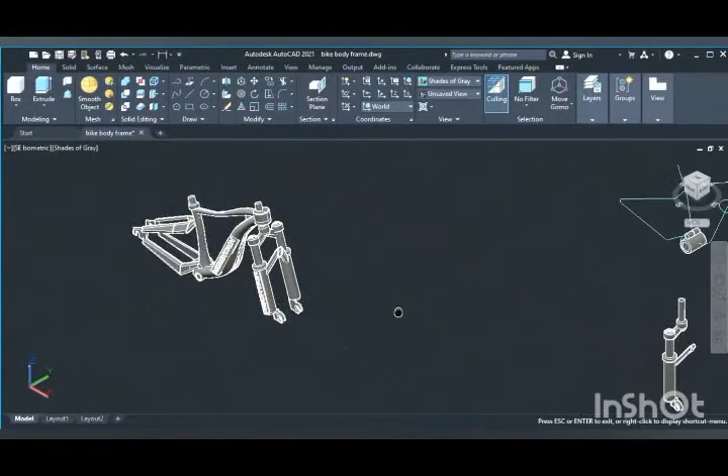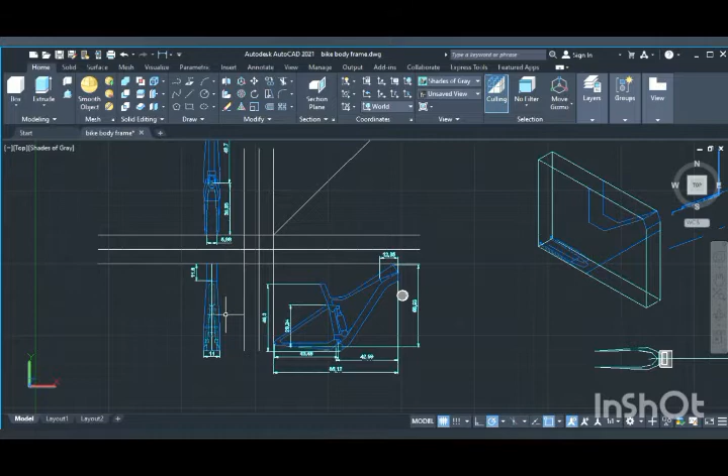Basically what I'm drawing for my part is the body frame of the bike and fork of the bike. First of all, I'm drawing the orthographic picture first because I don't have an actual bicycle that can give me a real measurement. So the measurement that I have is from the internet.

I'm drawing the fork first like this, then I'm drawing the frame. Then I'm drawing the circle in the middle of the path of the frame because I will be using the loft. I will copy it into 3 or 4 parts.

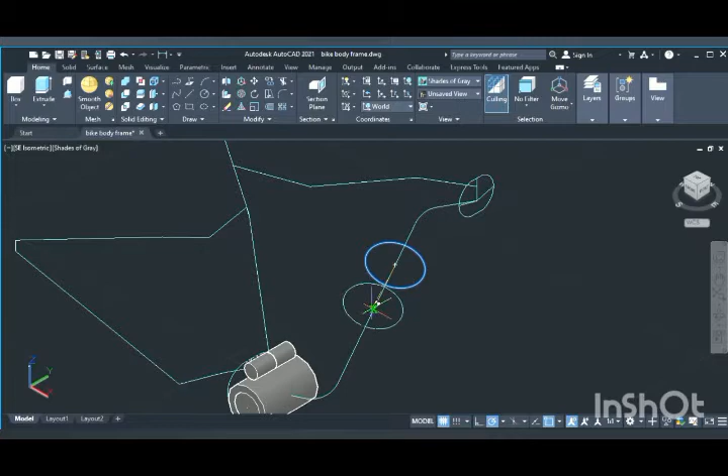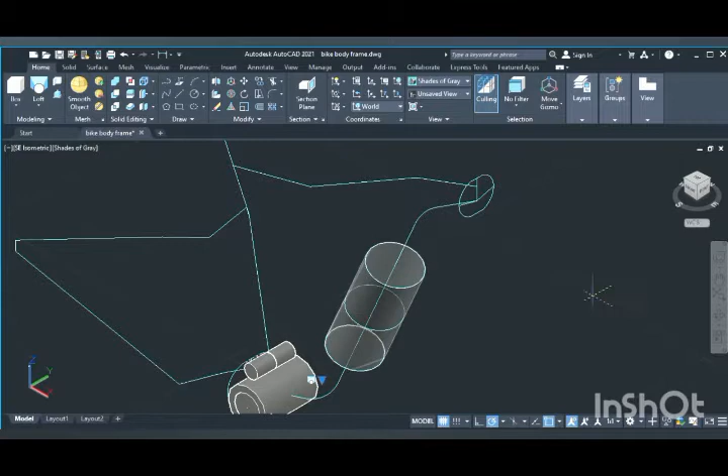I will copy the selection, take the middle and then transfer it to another path, like this. Then I will select loft to make a selection that will transfer into a 3D shape like this.

So I will get the perfect cylinder part. I don't want this size actually, so I will make a different size so it looks like this. I will start with smaller, then bigger, then at the end it will be the biggest.

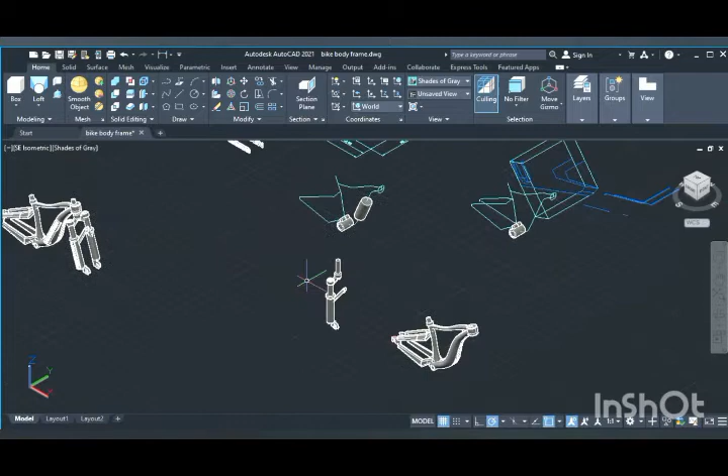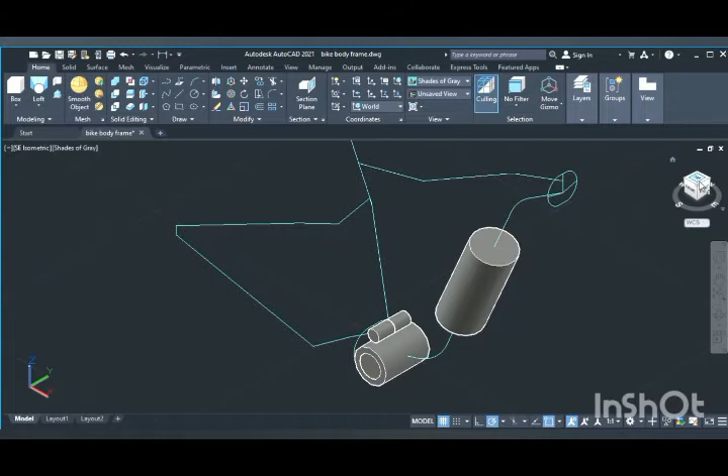Then for the back fork, I'm using the same concept, then I will copy it and transfer it using a mirror. First I will select it like this, then enter. It asks for the mirror 3D 3 points, so I will select the front, middle and end for the path, then enter.

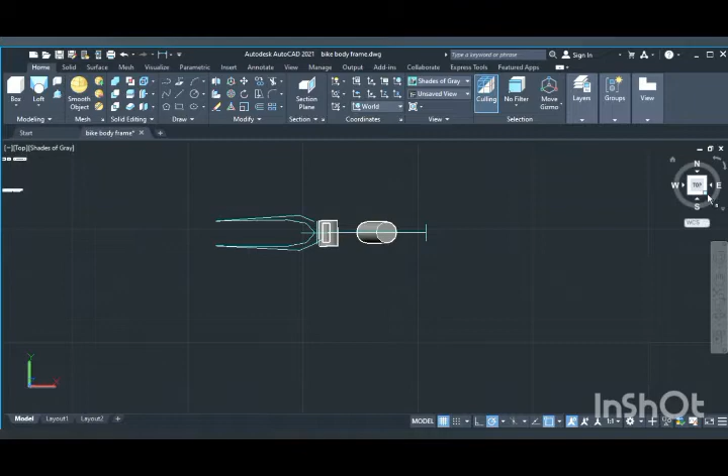Basically for the first time I will draw it, finish it for the side, then I will make a mirror. For the fork, it's still the same, because basically I'm just using a cylinder for the side, then I will transfer it to the other side. So I will have it like this.

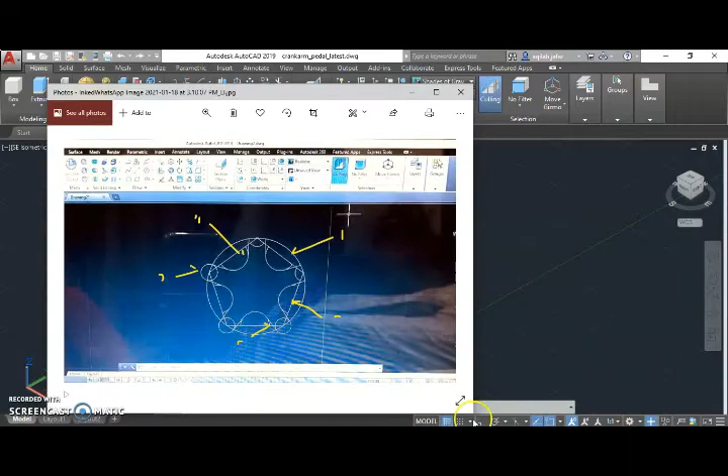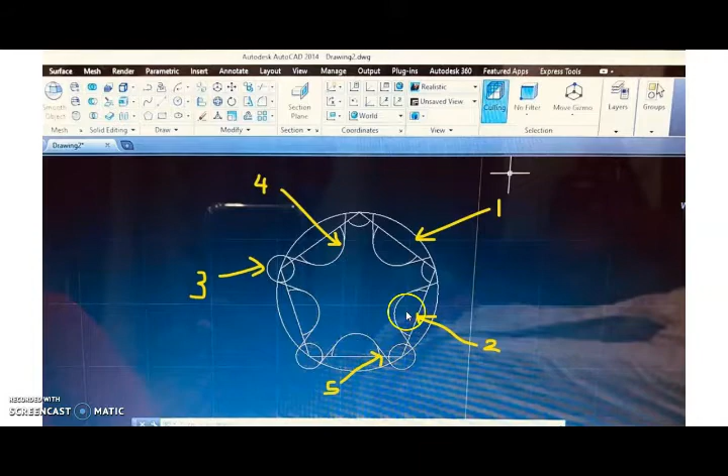Let me show you. First of all, I drew a big circle. Secondly, I drew a polygon. Thirdly, I draw a small circle according to the center of the polygon. Then I drew a circle again, taking the midpoint between the corner of the polygon as the center of the circle. Then I draw a line so that the small circle and the large circle will connect.

Finally, I trim the unnecessary line. Second step, I extrude it. For this hole, I made a circle first, then I press pull it. Lastly, I use fillet edge to make it look more attractive. Besides this part, I draw the cone first, then I subtract the part I want to remove, so it becomes a half cone.

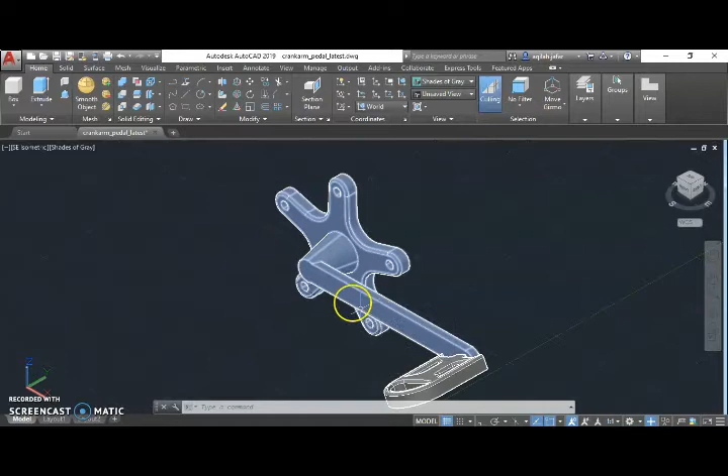For this part, I made a line first, then I join it and select extrude, half circle on each side. I made a circle first, then I subtract. This part also I subtract and put it together and select union. Last but not least, this pedal part, I drew the

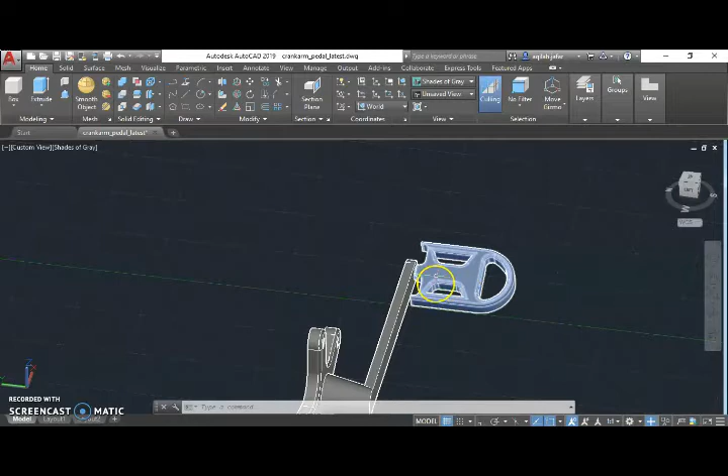rectangle first. For this part I use fillet. And then I drew a rectangle again and used fillet to make it curved. Then I used mirror to create the same thing for the other side. This side I use the same technique. After I join it all together, I extrude it, and for this part I use press pull to make the holes.

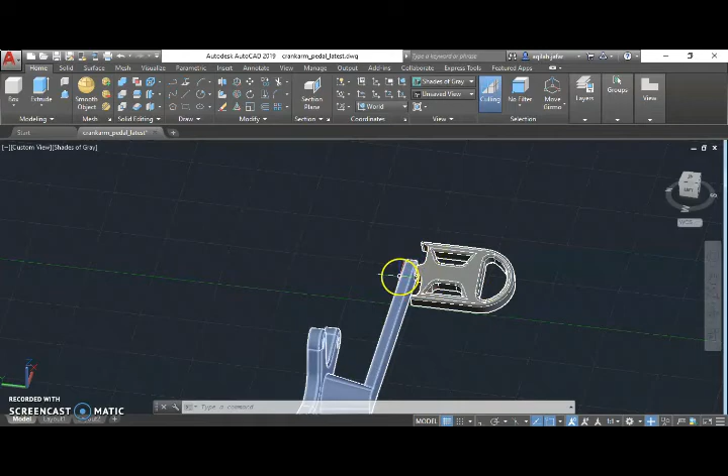This side I use subtract, and each side I use a fillet edge. Okay, like this. Lastly, let me move this pedal away.

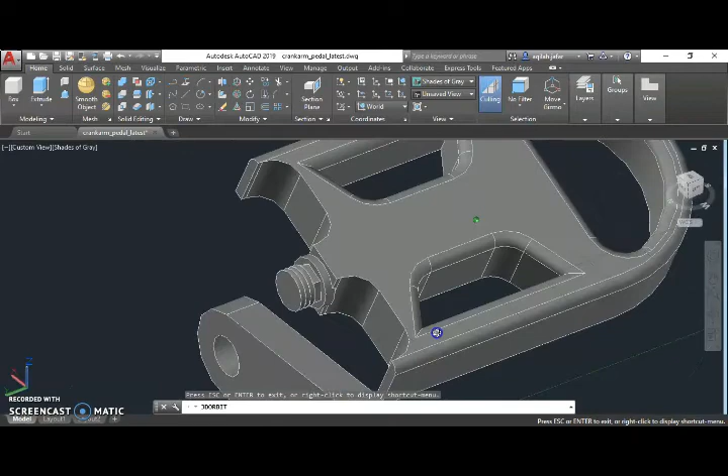For this side, the screw part, I draw a circle and polygon first. Then I extrude both of that. Then for this part, I use loft. Lastly, I select union.

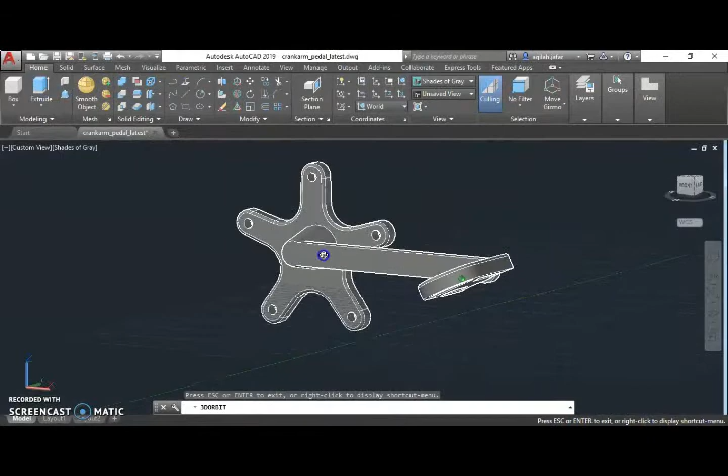That's all for my part. Thank you.

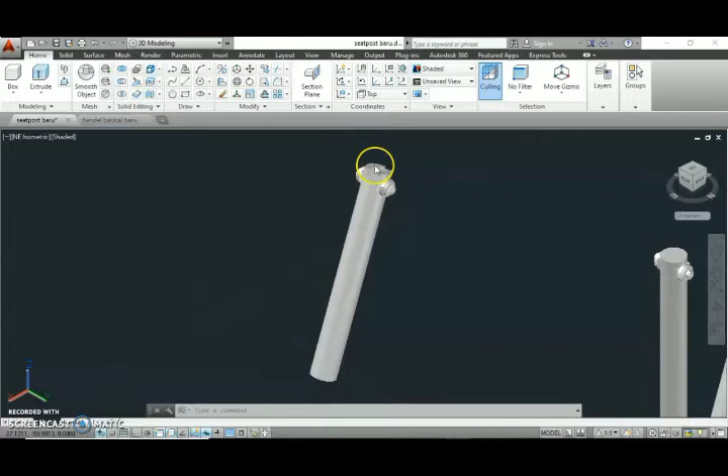So for this part, the way for the seat rod to be locked, first I use a double circle, and I use press pull. And then for this part, I use a cylinder and subtract it.

So this screw and nut, I'm using a polygon. I make it six sides, and I put a circle in the middle of the polygon. So I press pull it to a certain height.

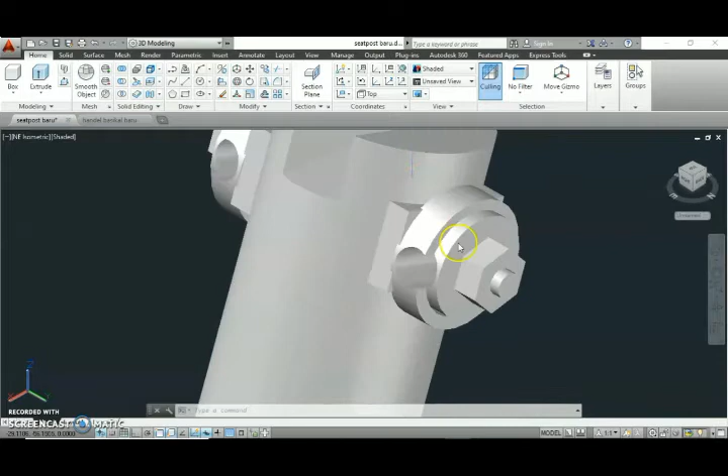Finally, all this part here I use copy from this side, and I put it here. So after doing all this part, I combine all the parts here to make it as one.

So next, my part is the bicycle handle. For the grip handle, I use a loft. I made two circles here and here, and used a single line between them, so finally it becomes like this.

For the middle rod, I use a cylinder. I put in a diameter and combine it with the handle. For here and this, I just use a simple circle and use press pull to make it high.

My first step will be drawing the holder for the spike, or in Malay we call it jari. First, I use 2D drawing where I sketch it first, then I use extrude and choose revolve. When I choose revolve, it makes this 3D shape. As you can see, this is the 3D holder for the spike.

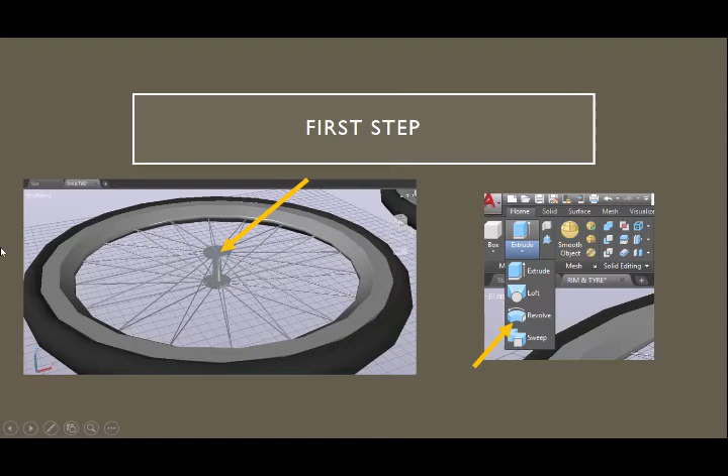For the second step, I make the rim and the tire. First I take a circle which will be the diameter, which will be 660.4 millimeters, and the width of the tire and rim will be 1.95 inches. If we convert it, it will be 49.5 something, like that.

So to make a big difference between rims and tire, I choose to make a different color. I went to visualize and material browser, where I pick the color rubber, which is black. When I drag it down, it makes the whole tire black, and inside it is the rim.

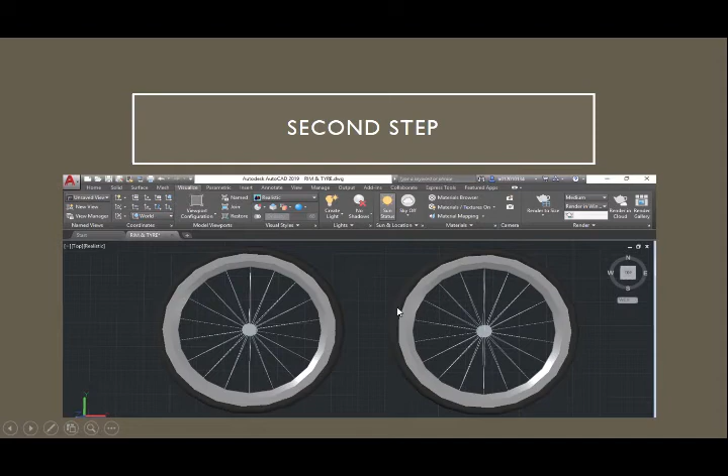For the third step, after making the tires and rim, I make the spike. First, to make the spike, I choose to make a triangle. Then I choose circle and put it at the end of the triangle, and I choose sweep at extrude and make it turn into a diameter of 2 millimeters, to make it beautiful like the real spike.

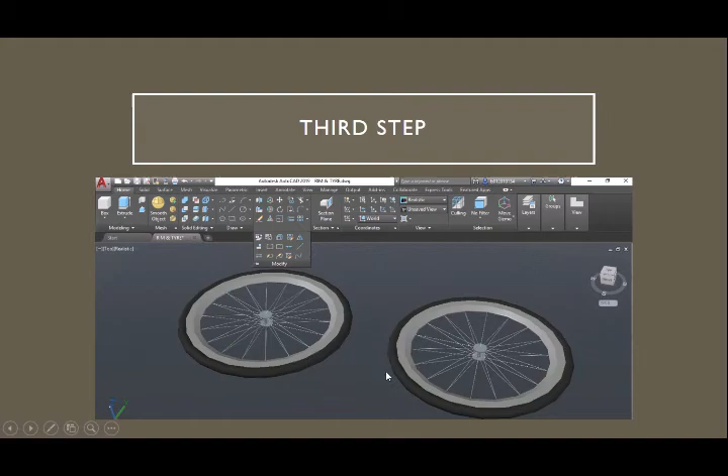So to make two tires and two rims like this, I use the mirror command, so I don't need to build another one with the same error or make many more errors. So I use mirror command.

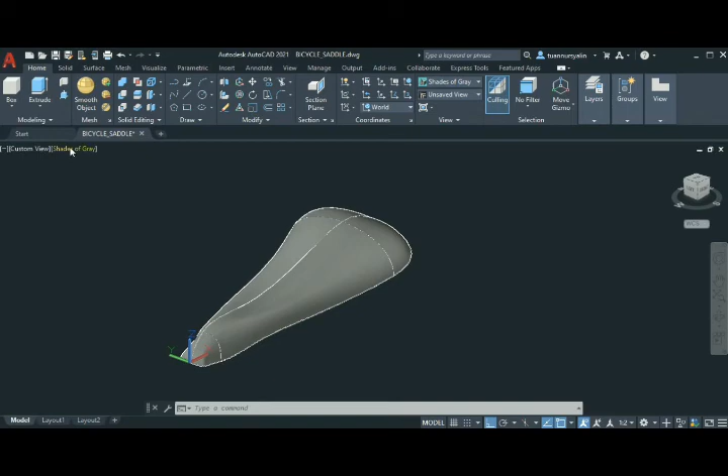Without wasting any time, I will show and explain a little bit how I set up this bike seat. First, I switch to wireframe. The reason I use wireframe is it makes it easier for me to generate and set the point or the center line of the object.

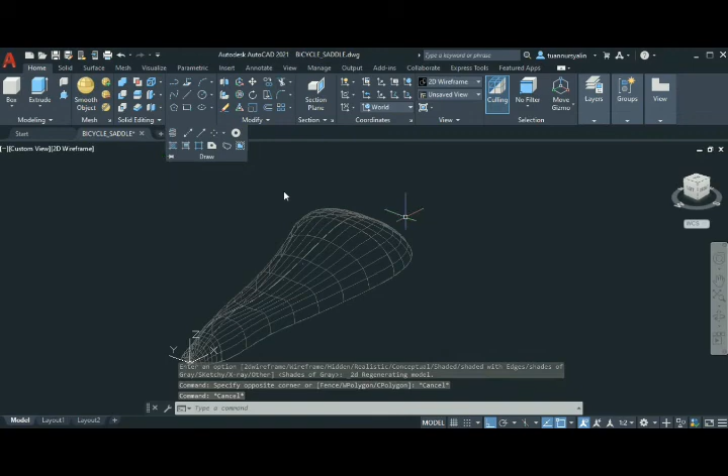First, I use draw, using multiple points, to combine all the points here. After using multiple points, I use the spline method. The function of this spline is to combine all the nodes that I have drawn just now. The dots here are all the points that I used.

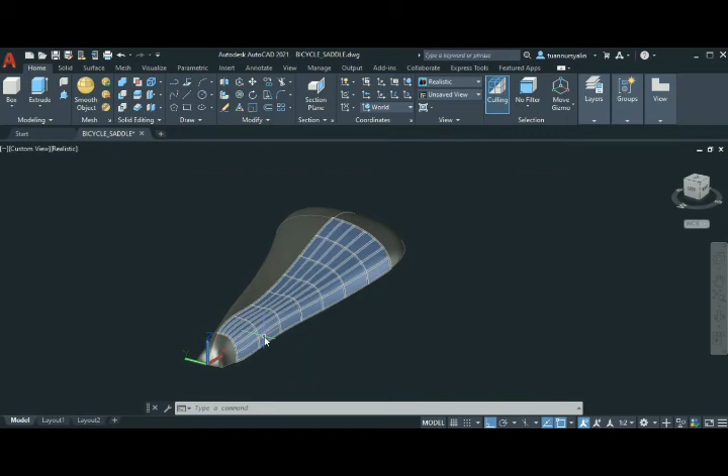After finishing merging the object, I convert this to realistic like this, and I change the position of the X, Y, and Z axis. Then I use the extrude method, and also the loft method. I also use the trim method here.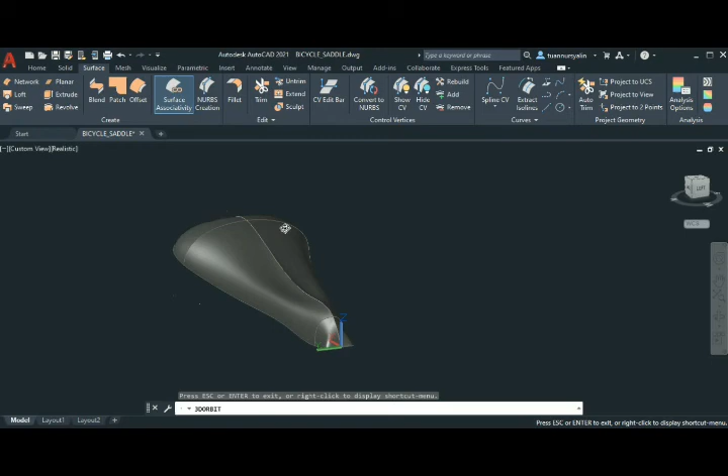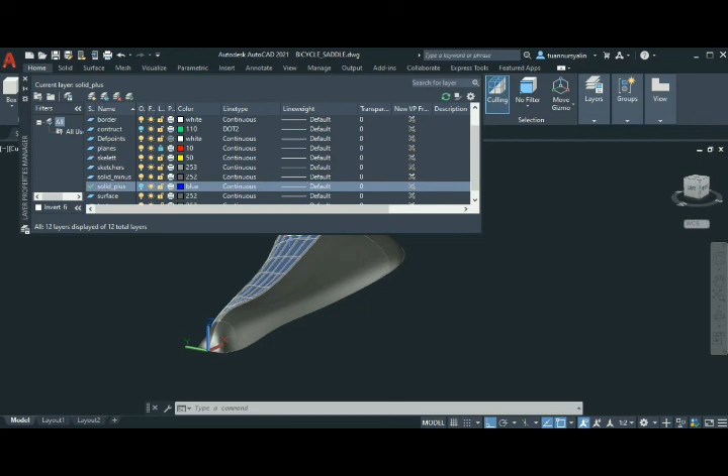I trim all the unwanted shapes. There are also several layers that I use, such as this solid plus layer, which is for me to hide all the unwanted lines, and this surface layer is the layer that I use to extrude and loft the object. This other line is for me to use to make this object here, at the back here, and here.

This makes it easier and really organized for me, then I can remember all the colors. It's really quite challenging for me to draw this object, but I think I have done it, and I hope this object and my friend's object can be accepted.